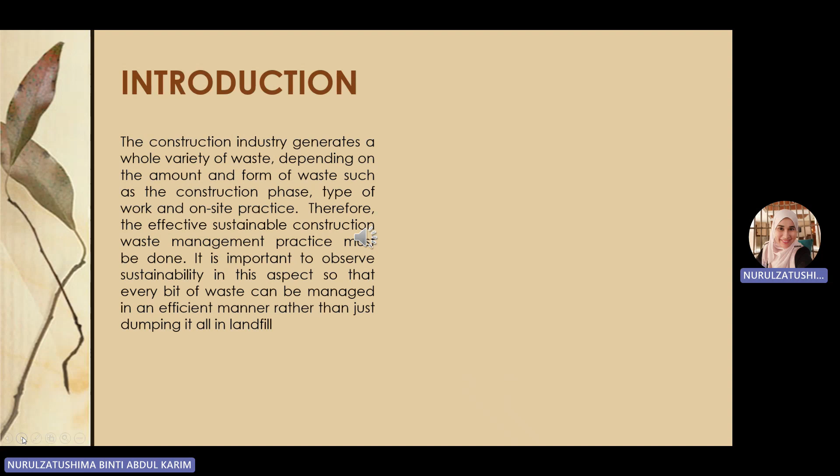For introduction, the waste generated in construction or the demolition of structures can be described as waste materials, and the construction industry generates a whole variety of waste depending on the amount and form of waste, such as construction phase, type of work and on-site practice.

Construction waste is classified as unused material or material produced in construction or demolition, including work of enhancement, preparation, repair or alteration.

Construction waste contributes to major municipal waste in Malaysia. Construction and demolition waste generate about 26,000 tons of waste daily that make their way to the landfill to be catered for. This is becoming a pressing issue as the landfills available in Malaysia are now fully loaded, and new landfills are being opened to cater for the waste generated by the municipality, which includes construction and demolition waste.

So the main reasons for construction waste are design defects, inadequate procurement and planning, improper material handling, raw material residue, and unforeseen modification to building design.

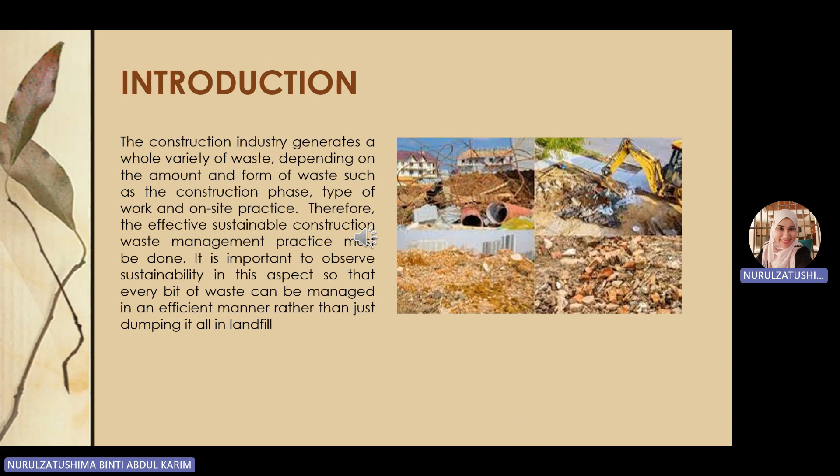The development and implementation of a systematic and realistic integrated waste management plan that handles construction waste in time is a potential way to solve this problem. So the possible solution is a systematic and pragmatic integrated waste management plan that manages the quantity and kind of construction waste, and to develop and implement it.

On the next slide is about the waste management practices. Waste management practices are a strategy that can cater to the problem of construction waste. There are a few strategies, and the most popular is like 3R: reduction, reuse, and recycling of the waste.

Reduce is known as source reduction because the waste has been reduced from the start, by reducing the material that will be used from the source, before the waste becomes a physical problem.

Reuse means returning part of a product or waste to be used for the same purpose repeatedly, and this effective reuse retains the existing structure of the material or article and requires no extra time or energy.

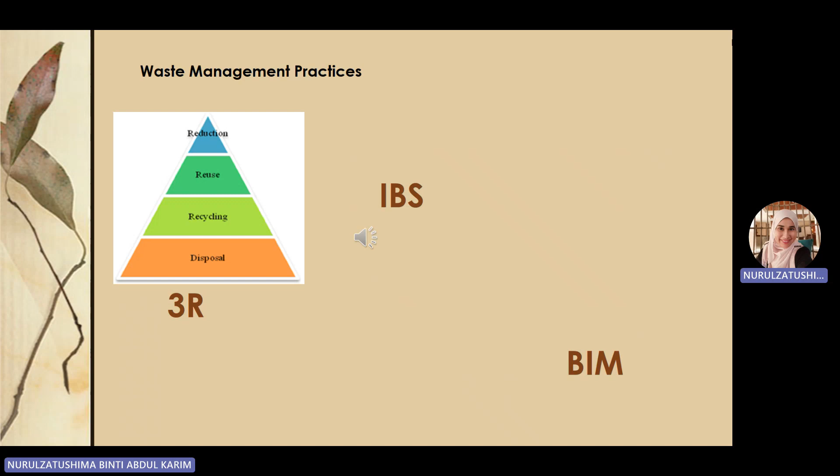Recycling means that the product that is otherwise thrown away is isolated, stored, processed and commercialized, and eventually used. Then we have IBS.

IBS is the Industrialized Building System. It is a construction process that uses technologies, materials, components or building methods. IBS is widely known as the term for preparation, concept,

implementation, component, and IBS is widely known as the term for preparation, concept, implementation, and is understood by common practitioners. IBS is responsible for substantial reduction in waste, which can be an agent of building efficiency and the manner in which natural resource use can be reduced.

Okay, the next is BIM. BIM stands for Building Information Modeling, a building information system that models, resulting in a data-rich, object-oriented and smart visual representation of the facility, which can provide data that is relevant to the needs.

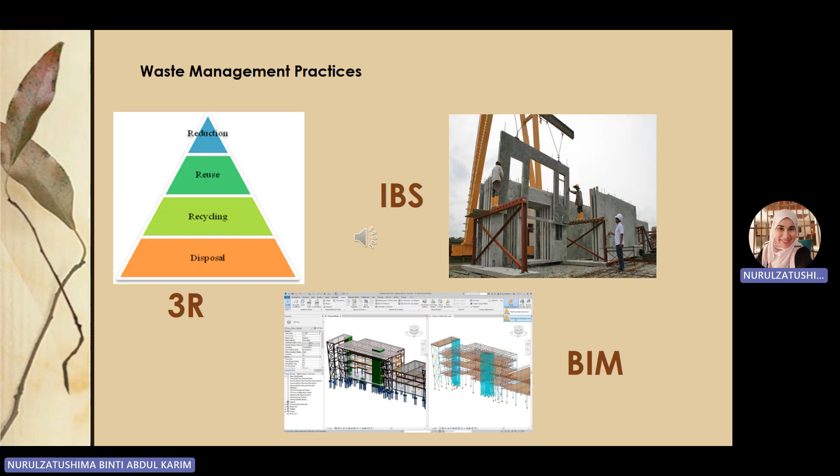In the last 10 years, BIM has been the latest engineering method most used in the construction sector, and it is a great tool to use for green building construction, because at the early stage of construction by using BIM, waste management is applied.

For the problem statement, buildings in Malaysia produce a lot of building waste, causing important environmental impact and increasing public concern in the local community. In the last 20 years, the production of construction waste has increased over substantial project building and infrastructure development. Local construction sites are often affected by unnecessary waste due to inadequate waste management.

Sustainable waste management is one of the prevention methods that can be applied to prevent construction waste from becoming a contributor to pollution, so that environmental sustainability can be achieved. Therefore, this study is conducted to evaluate sustainable construction waste management to guide contractors and consultants through this analysis in determining the ranking of sustainable construction waste management.

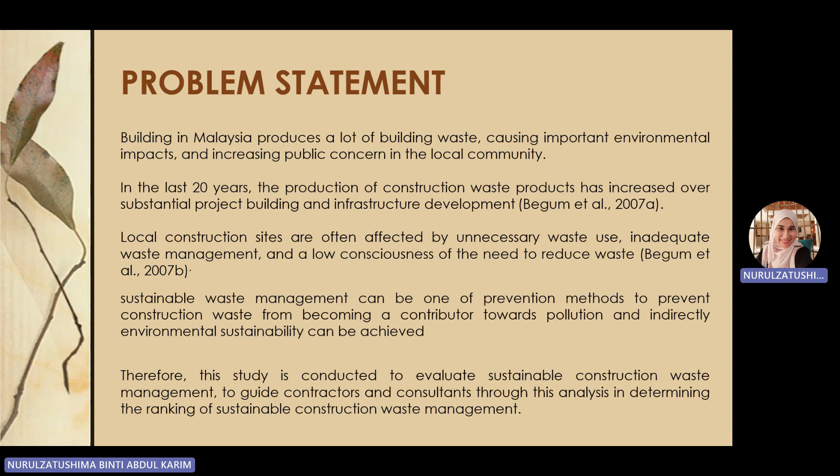So the objective of this study is to evaluate the implementation of sustainable construction waste management practices in the design and construction phase at construction sites in Pulau Pinang.

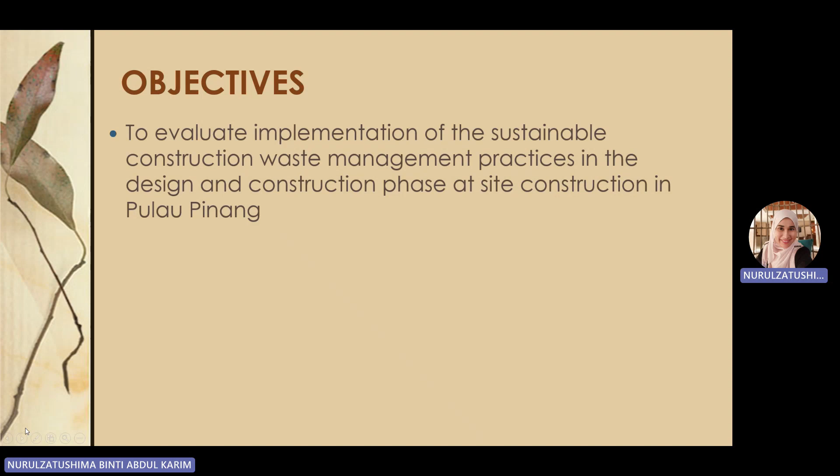To carry out this study, the methods we apply are a quantitative method, using a questionnaire.

There are a few stages in the questionnaire. First, we design the questionnaire, and this questionnaire consists of sections. Section A is demographic data for the respondent, and section B is to determine the effectiveness of the current waste management practice. There are three sections in total, and section C is to determine the most benefit in implementing sustainable construction waste management.

Then the questionnaire is developed through review, from which we get the data, and then we determine the questionnaire. Then we go to the pilot study.

The pilot study is the important part where we want to seek expert advice, and then based on the feedback from the experts, we design the question, and then distribute the questionnaire to consultants and construction contractors around Pulau Pinang with grade G4 and above,

registered under CIDB. The survey is then analyzed using data analysis with SPSS version 25 to get the result.

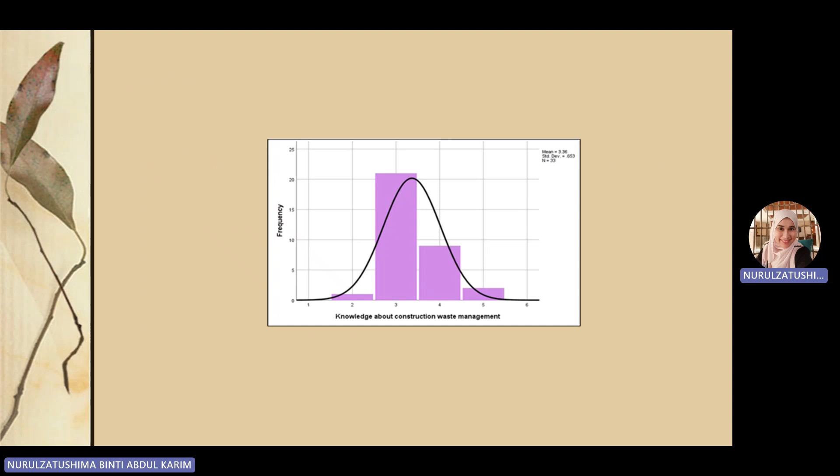This indicates that the average knowledge about construction waste management among respondents is quite good, and it can be concluded that most respondents have good knowledge about construction waste management, so the data from this survey is reliable.

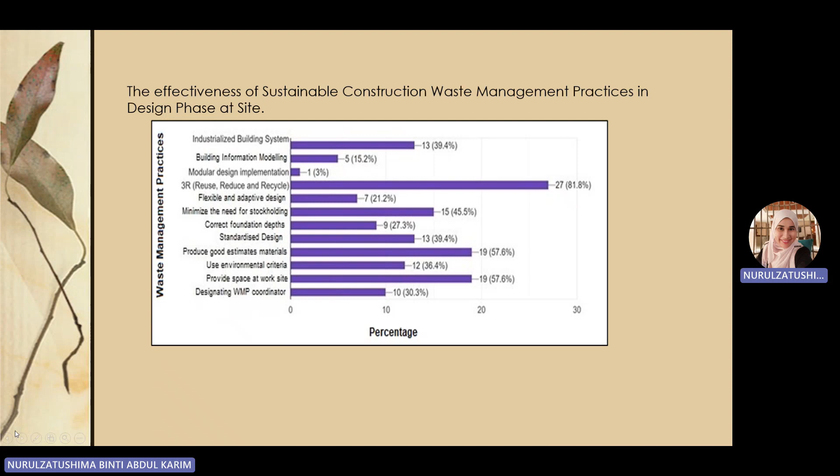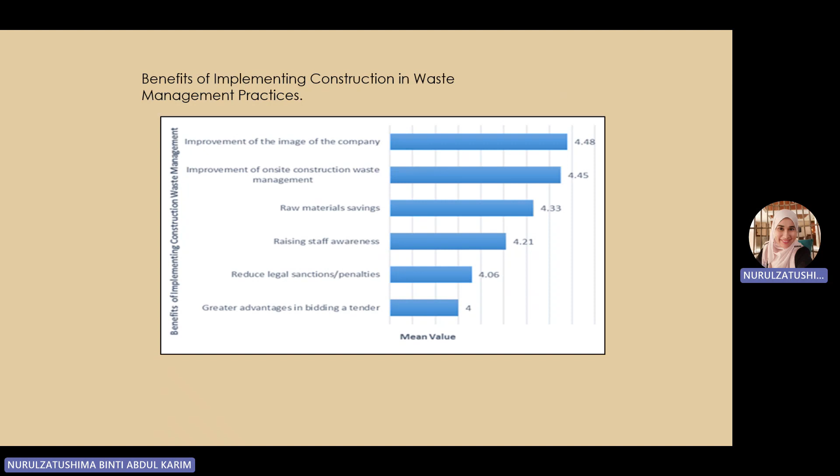So for the conclusion, you can see from the result that the three best sustainable waste management practices chosen by construction site experts will be the best solution to prevent waste generation from causing environmental pollution.

The reason most construction players chose 3R is because it is more cost saving rather than IBM and IBS methods. 3R is also easy to understand and conduct for everyone with basic knowledge about recycling, reducing, and reusing.

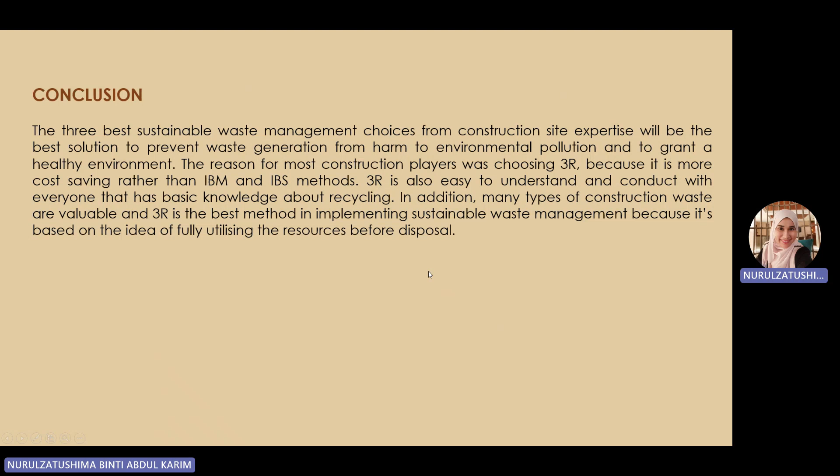Improvement of the company's image is the most cited benefit of implementing sustainable construction waste management. This indicates that a company's image can be raised through implementing sustainable waste management effectively and properly, which is a good sign for the construction industry to start implementing waste management at site.

So the result from this study can serve as a guideline and reference for all players in the construction industry in managing and planning construction waste management. Minimizing waste generation will contribute towards sustainable waste usage.